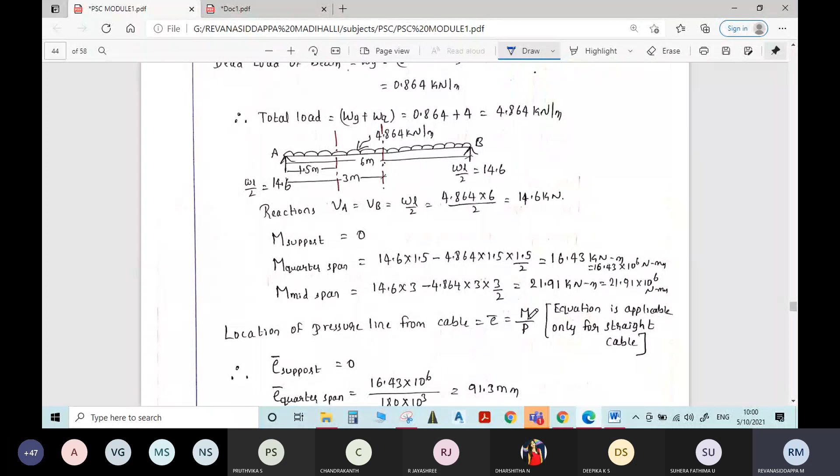Where M is the moment at the point of interest. If you are locating a pressure line at support, you have to take moment at support. If you are locating it at mid span, take corresponding moment at mid span, similarly at the quarter span. This P remains the same, the pre-stressing force remains the same.

Now write the given data. P is equal to, for this second problem, how much is it given? It is given as 180 kilonewton. So P is equal to 180 kilonewton.

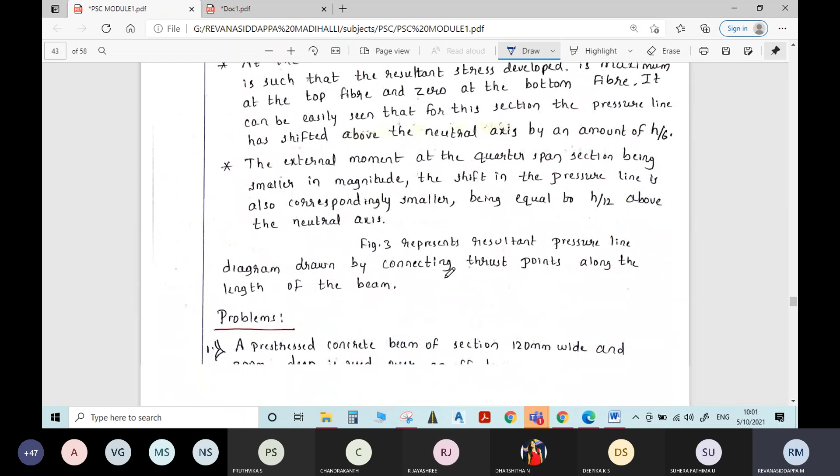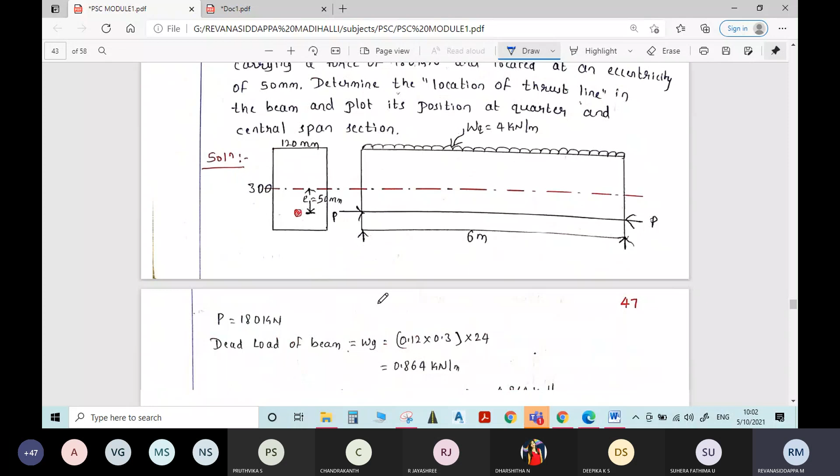Then dead load of the beam. Just a minute students. Is it inclusive? No, exclusive of self-weight, sorry I did not see it properly. It is not inclusive, it is exclusive of self-weight. You have to find it separately, then add it to the live load. I did not say it properly - it is exclusive of self-weight. Now you have to find the self-weight on the beam, dead load on the beam.

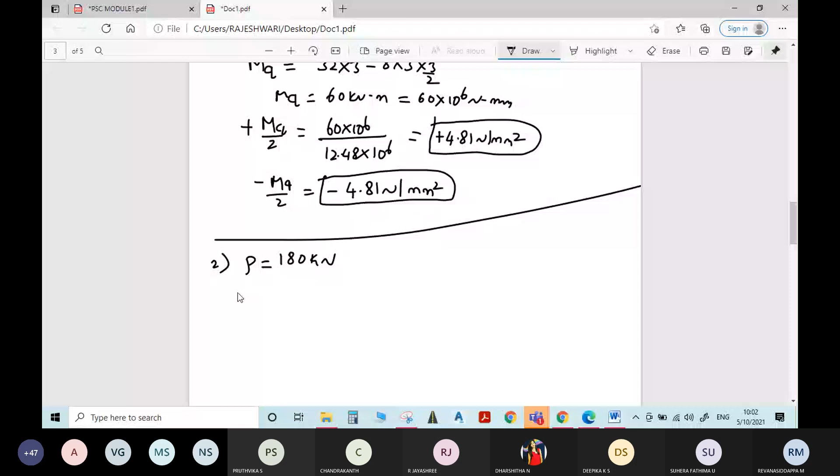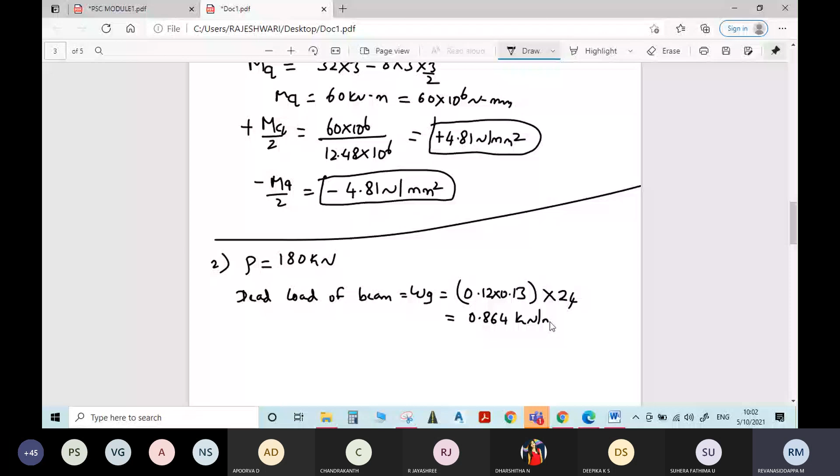Dead load of the beam, WG, is equal to cross sectional area - how much is it? It is given as 120 mm by 300 mm, so it becomes 0.12 into 0.3. Density is known, it is 24 always. Sir, it's 0.12 into 0.3. Sorry, 0.3, I'll make it 0.3.

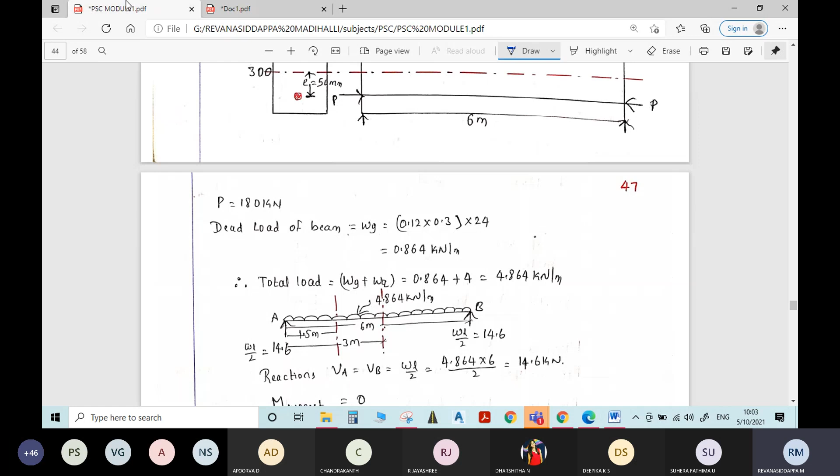Now dead load is 0.864 kilonewton per meter. Live load is given as 4 kilonewton per meter. The total UDL on the beam becomes how much? Therefore the total load UDL is equal to 4 plus 0.864, which is 4.864 kilonewton per meter.

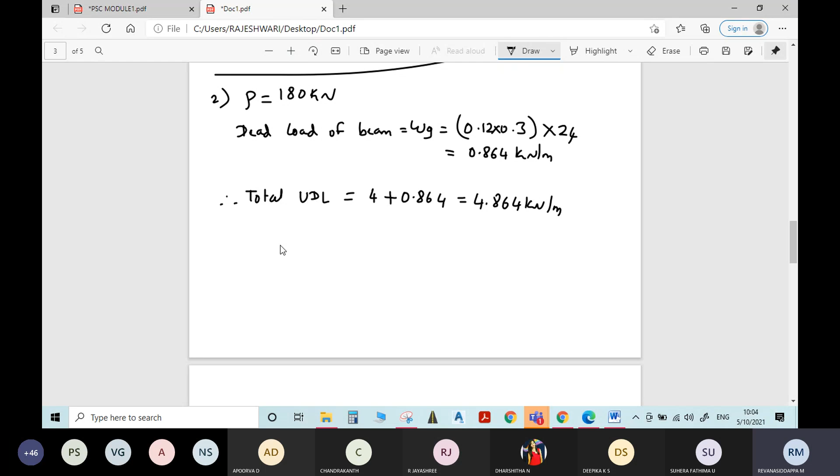Now we have the formula to locate the thrust line, E is equal to M by P, where M is the moment at point of interest. Here it is asked to locate the thrust line at support, quarter span, and center span. First we will find the corresponding moment at support, mid span, as well as quarter span. Write the diagram.

So the beam is acted upon by a total UDL of 4.864 kilonewton per meter. What is the total length of the beam given? 6 meter. Total length of the beam is 6 meter.

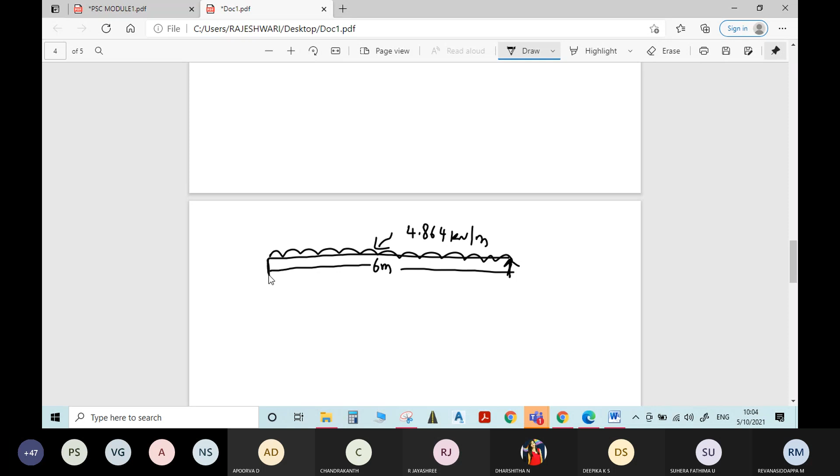Now we have to locate the thrust line at quarter span and at center span. Quarter span means total 6 meter becomes 1.5 meter, and mid span is 3 meter. First you find the reactions at the supports.

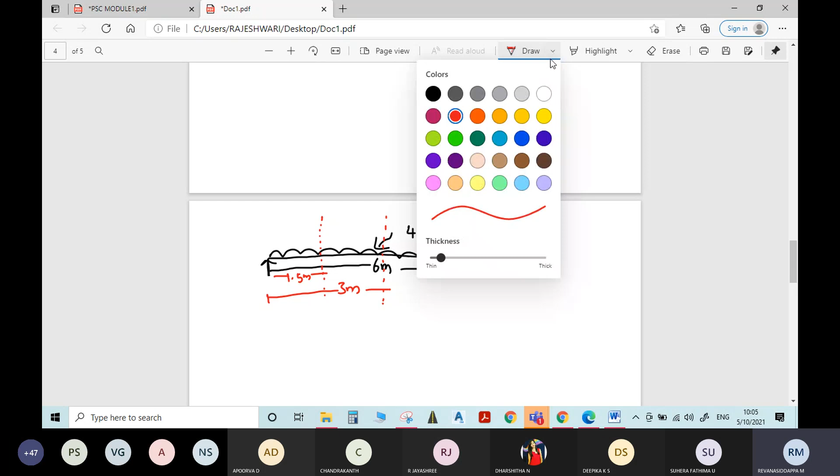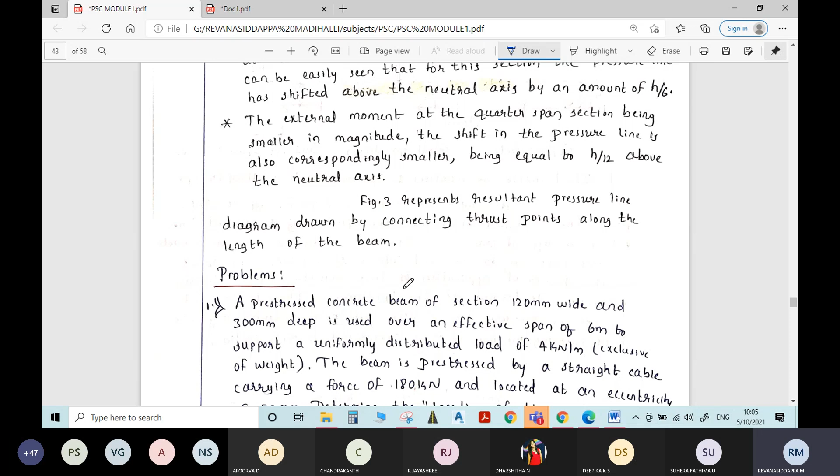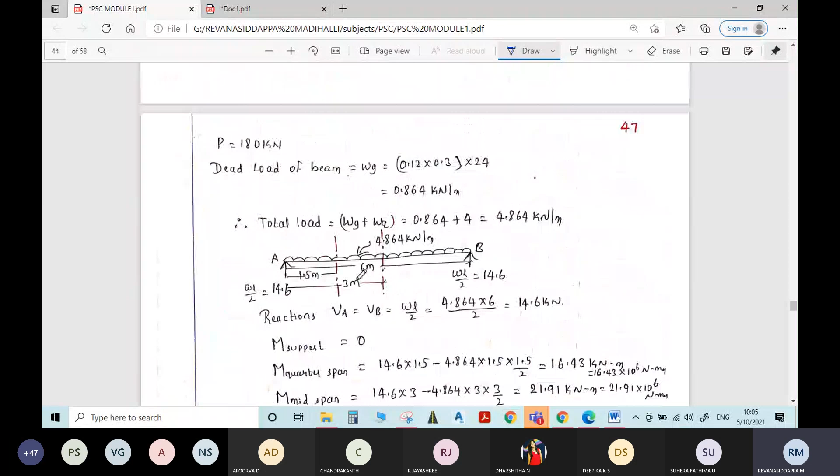Sir, how is it 1.5 and 3 meter? See, in the question they have asked to locate the thrust line at quarter span and central span. Quarter span means 1/4 of total length - 1/4 of 6 meter is 1.5 meter. Central span means half of total length, which is 3 meter.

Okay, WL by 2 - what is the reaction? Tell me. See, 4.864 into 6 divided by 2. How much will you get?

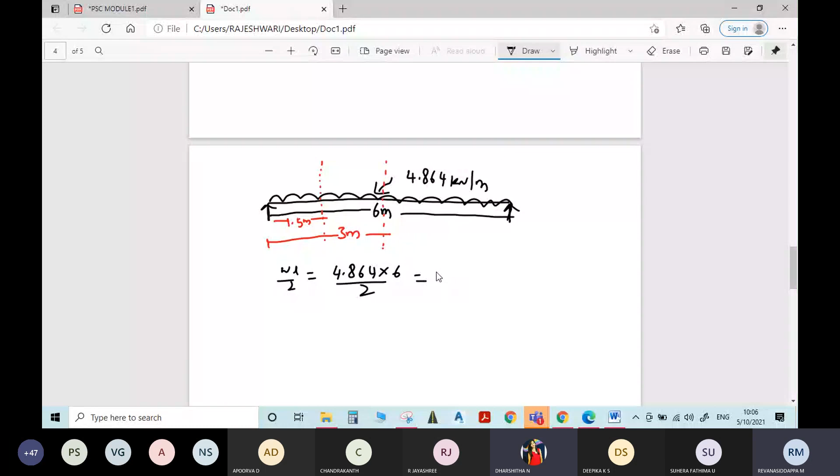14.6 kilonewton. Yes, right answer.

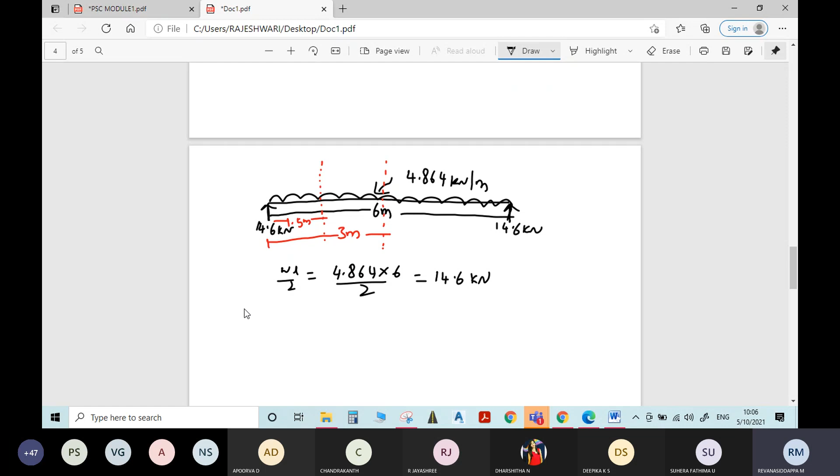14.6 kilonewton and 14.6 kilonewton. Now you find moment at support, quarter span and mid span. Moment at support is equal to, what is moment at support? It is 0 only, right? Moment at support will be 0. 14.6 into 0 and the UDL not yet started. It will be 0 only always.

Moment at mid span will be equal to 14.6 moment of that reactive force at center of the support. Force is 14.6, perpendicular distance is 3 meter into 3 minus moment of this UDL about center. It is 4.864 into 3 into 3 divided by 2. From here to here, the length is 3.

Convert this into point load. If you convert this into point load, 4.864 into 3, it will be a point load into perpendicular distance is 3 by 2. Answer?

Or else you can directly take WL square by 8 formula also. No issue with that. You can find the moment by using reaction, or you can directly apply the formula of WL square by 8.

What is the answer? 21.91 kilonewton meter. 21.91 into 10 power 6 Newton millimeter.

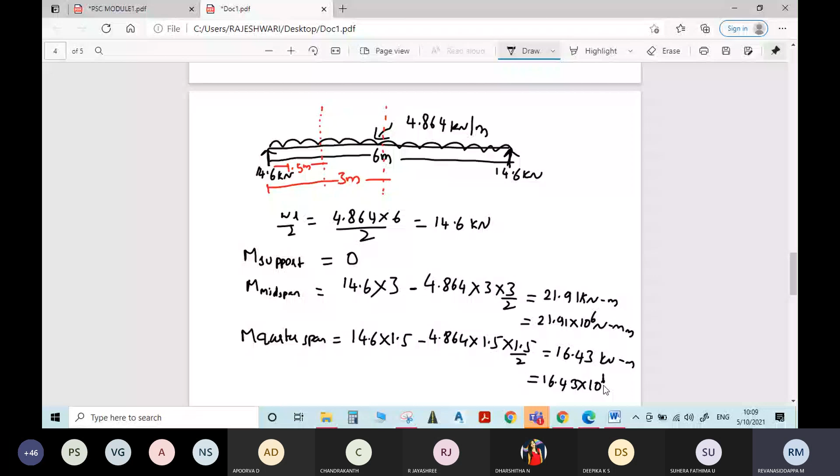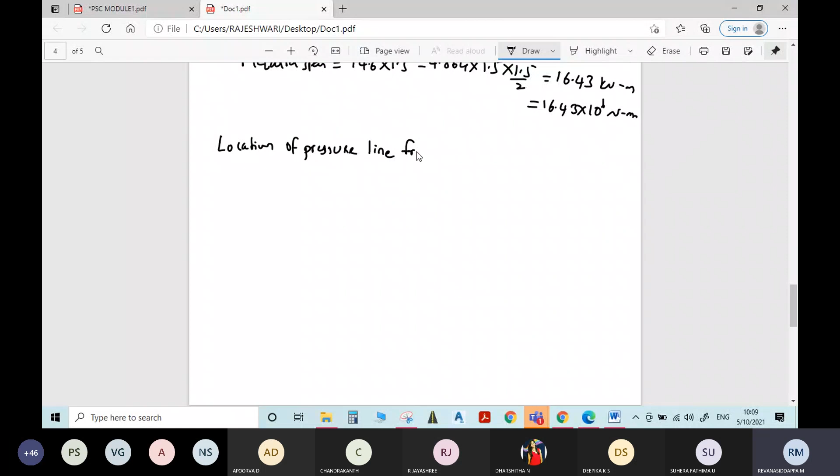Okay, now write that formula. The formula is location of pressure line from the cable. Okay, that location is always with respect to the cable. From the cable, we will denote it as E bar is equal to M by P. E bar is equal to M by P, and this equation is applicable only for straight cable.

In the bracket you write it. Equation is applicable only for straight cable. In the bracket you write it. Okay, if it is a parabolic cable, procedure is different. In the bracket you write it.

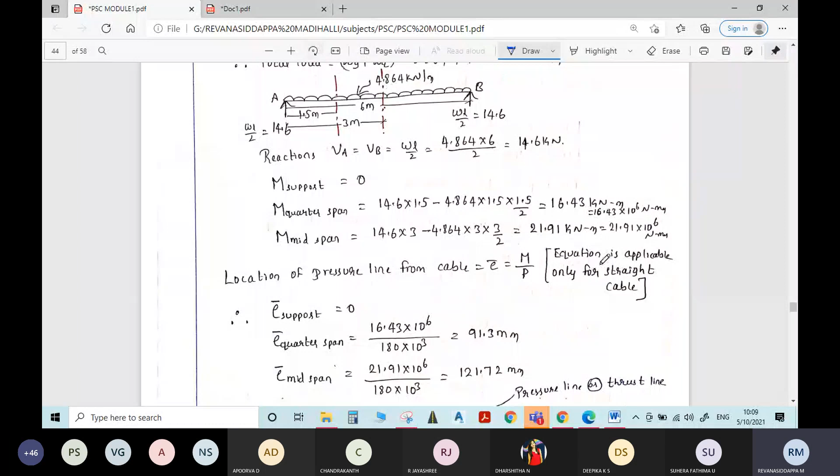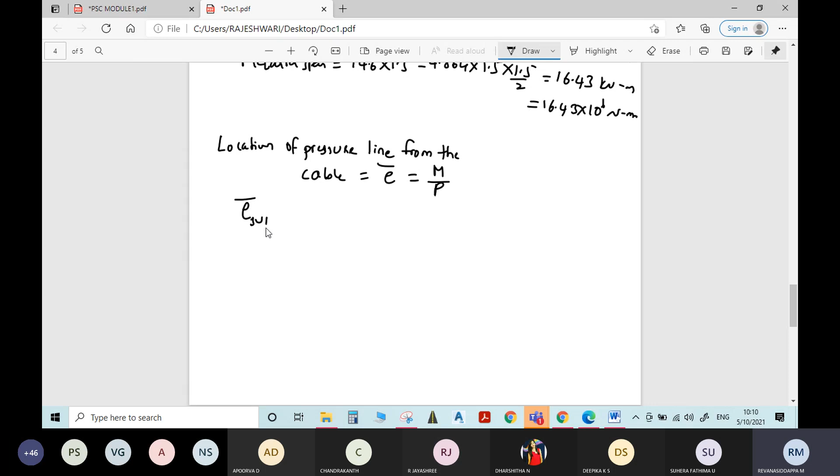Okay, now you go on finding location of the pressure line at each and every point. First at support, E support is equal to, it will be 0 only. Moment at support is 0.

Then E bar at quarter span you find. Quarter span is equal to, moment at quarter span is 16.43 into 10 power 6 divided by the pre-stressing force is how much it is? 180 into 10 power 3.

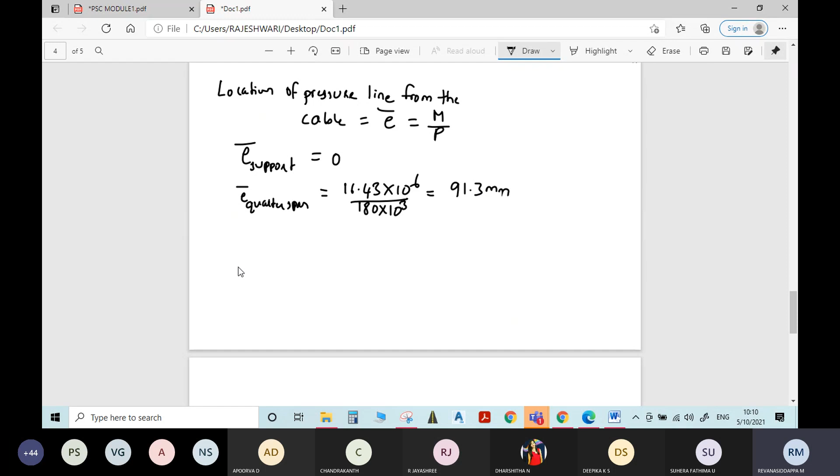So what's the location? What is the answer? 91.3 mm. Similarly, you find location of pressure line at midspan is equal to, corresponding moment at midspan is 21.91 into 10 power 6 divided by P is 180 into 10 power 3, is equal to how much? 121.72 mm.

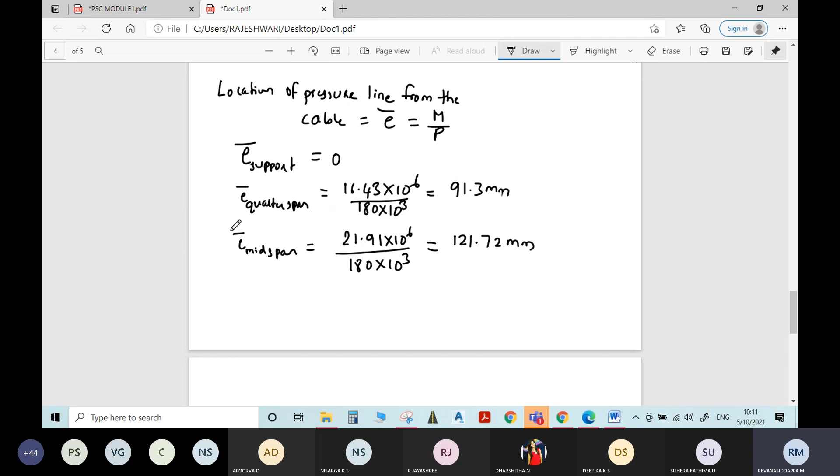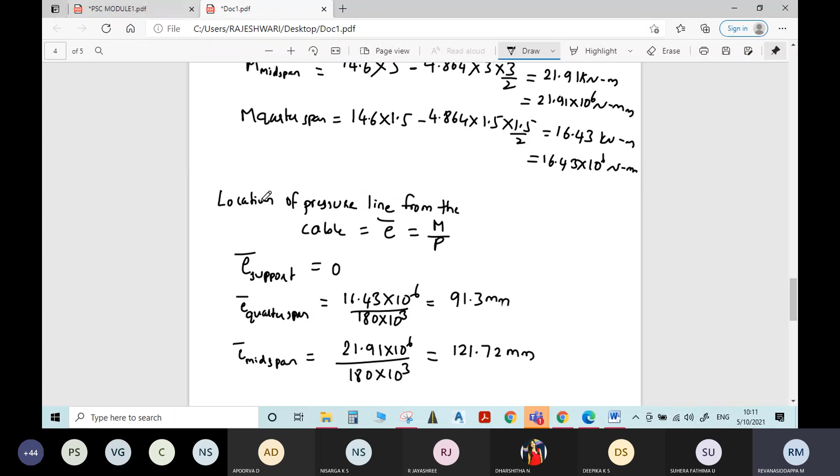Okay, now after getting location of pressure line at each and every point, you have to write the diagram accordingly. Okay, here I already written the diagram. Before copying, you just listen here. See, whatever the formula which we have, it is distance of pressure line from the cable, with respect to the cable. At support, distance of pressure line from the cable is 0, at support.

Okay, and I have marked midpoint, quarter span. At quarter span from the cable, distance of pressure line is how much? 91.3 mm. Okay, at quarter span, I have marked a distance of 91.3 mm. Similarly, at center of the span, it is at a distance of 121.72 from the cable.

Okay, similar in the same way, you will get points on other side of the beam. Finally, you join together, you will get a pressure line or thrust line. Write this diagram quickly.

And note on the next problem also.

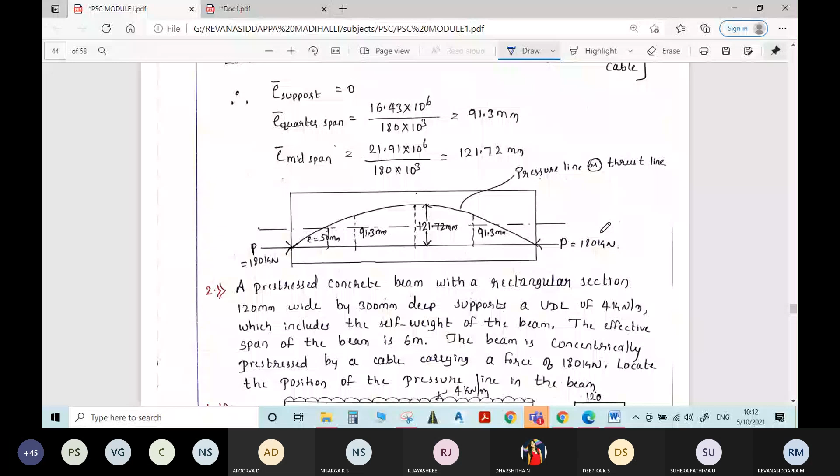Sir, if they have not given this exclusive of weight, what should be the procedure, sir? We should not consider this dead load. If it is not given, then individually you have to find selfweight.

If it is not given means exclusive of weight. If it is not given means, even if it is not given, then you find the selfweight. Okay, selfweight you add it.

See sir, here in the second problem you see here, deep supports UDL of 4 kN per meter, which includes the selfweight. Means selfweight is already included. Okay, then no need to find the selfweight. Okay, directly you find the moment for this load given.

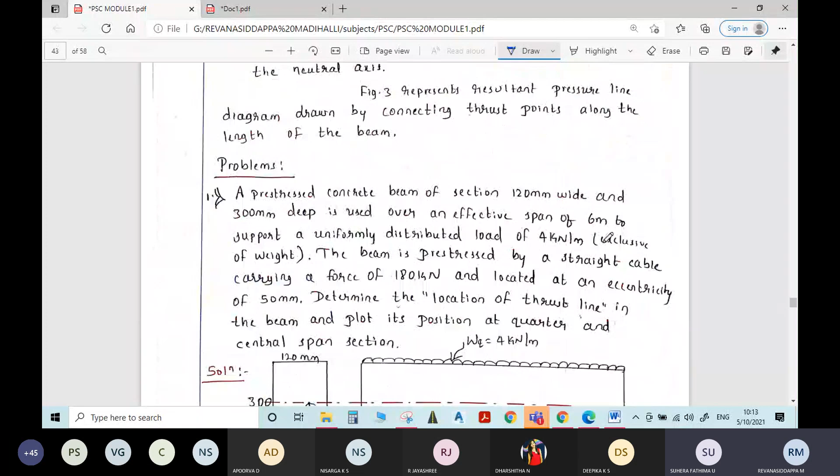Here it is said that exclusive, then you need to consider selfweight. Okay, if anything is not said, whether it is inclusive, whether it is exclusive, if anything is not said, then in that case also you find the selfweight and add to the live load and find the thing.

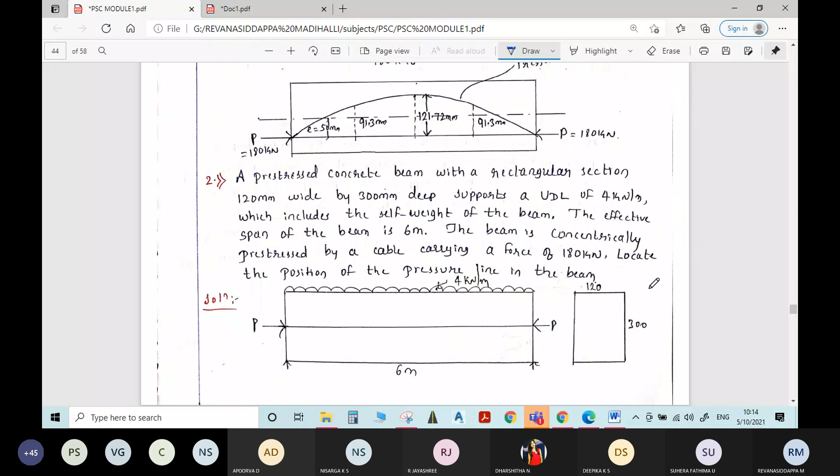Write the next problem also after writing the figure.

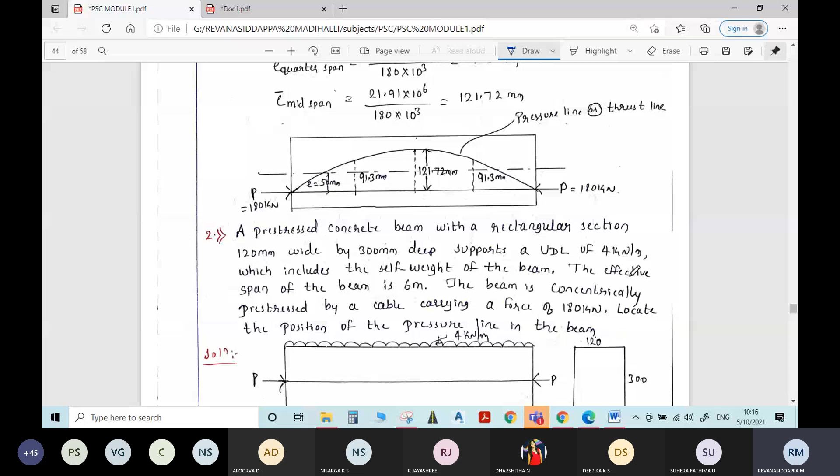Go on solving the problem. Okay, same procedure. Only the thing is self-weight, you need not find it. Directly take the live load of 4 kN per meter and locate the thrust line. So directly take this 4 kilonewton per meter, find corresponding moments, find eccentricity and draw the diagram. That's all.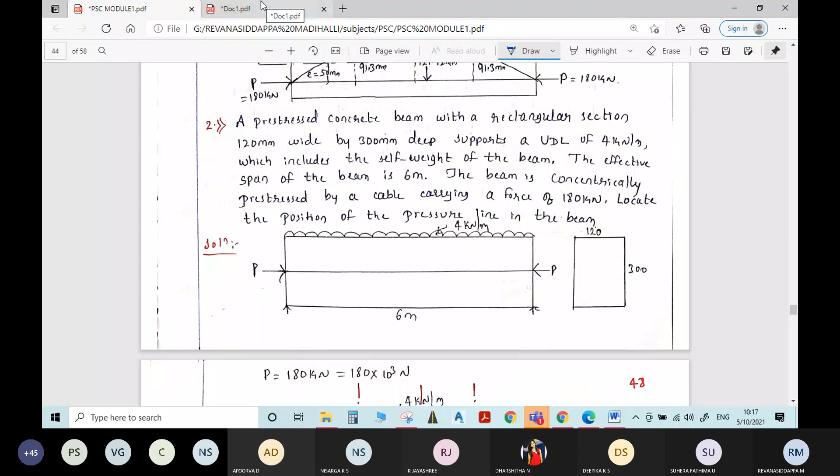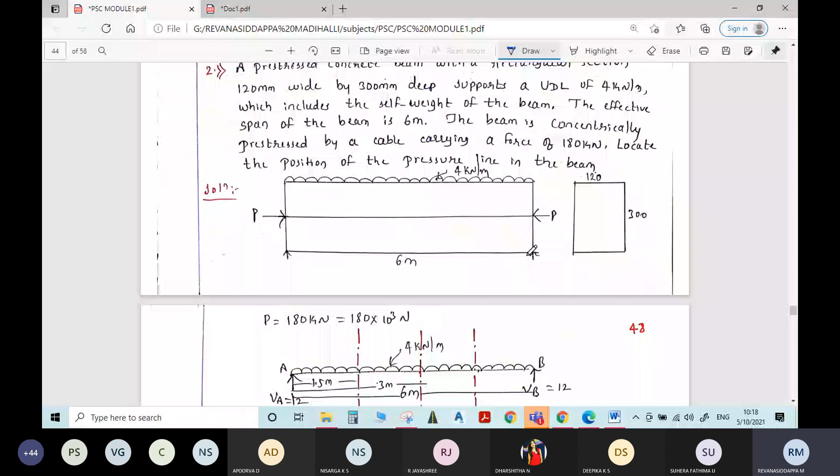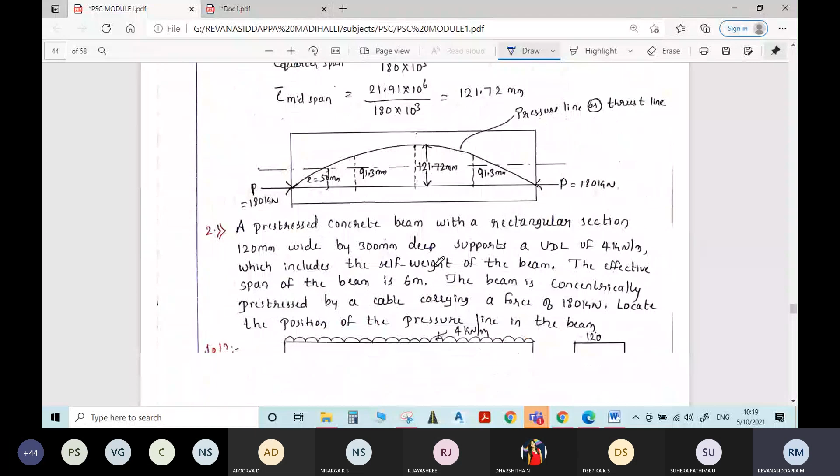Shall we solve now? Here it will be 4 kilonewton per meter. Here the reaction will change. What will be the reaction here? 4 into 6 divided by 2. I think 12 it is, right? We'll get 12 kilonewton. All of you written the problem, right? Same procedure. Instead of 4.864 here, you have only 4 kilonewton per meter. Check your answers.

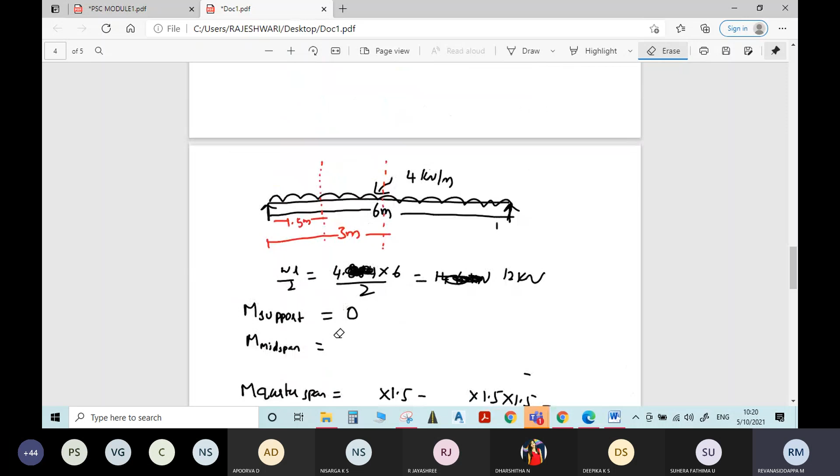What is moment at midspan? Anyone solved? Midspan moment. Tell me. Reaction is 12 kilonewton on either side. 12 kilonewton here also. How much moment at midspan? Anyone? 18, sir. Yes, it is 18. Correct. At quarter span also you find. It is 12 into 3 minus 4 into 3 into 3 by 2. You will get 18 kilonewton meter, which is 18 into 10 power 6 Newton millimeter.

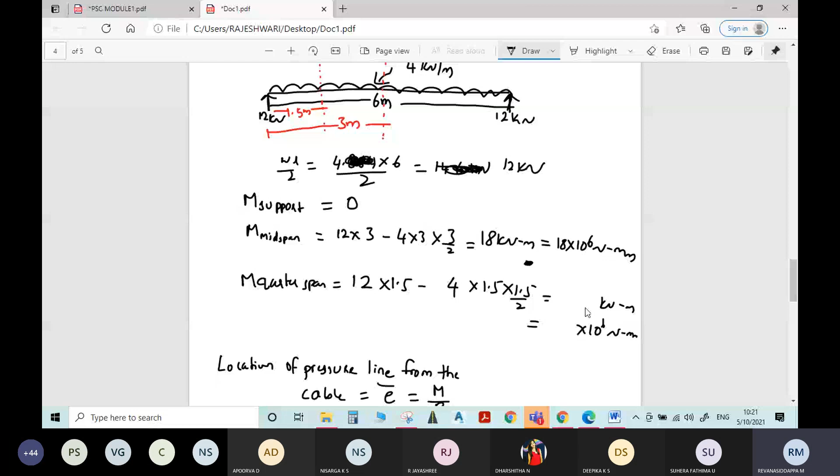At quarter span it is 12 into 1.5 minus live load 4 into 1.5 into 1.5 divided by 2. Tell me the answer. 13.5, sir. 13.5 into 10 power 6 Newton millimeter. Write the same formula. Here at quarter span 13.5 into 10 power 6. Then at midspan 18 into 10 power 6.

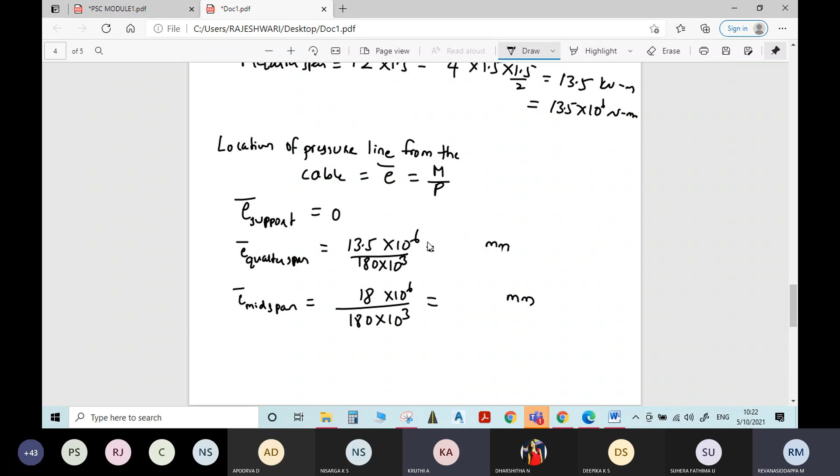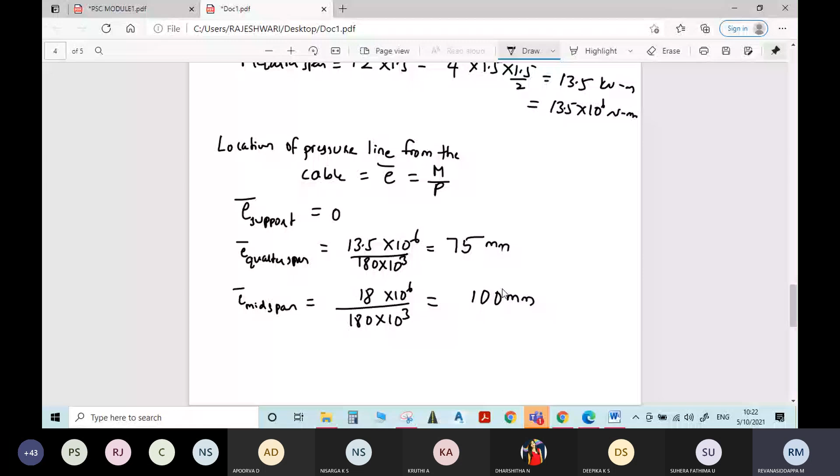Anyone got the answer? Tell me. 75 mm, sir. 75 mm. At midspan? 100, sir. Yes, 100 mm. Write the figure. At quarter span, eccentricity is 75 mm. At midspan, eccentricity is 100 mm.

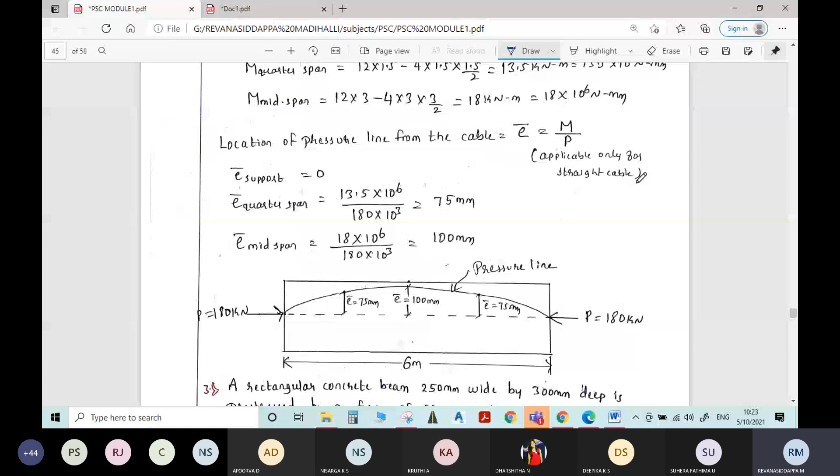After writing the figure, write the next problem. Try to solve this problem. Problem number 3. Instead of UDL, he has given a point load of 68 kilonewton. Follow the same principle. You find the reaction, you find the moments at quarter span, mid span. Use the same formula. Same procedure you have to follow.

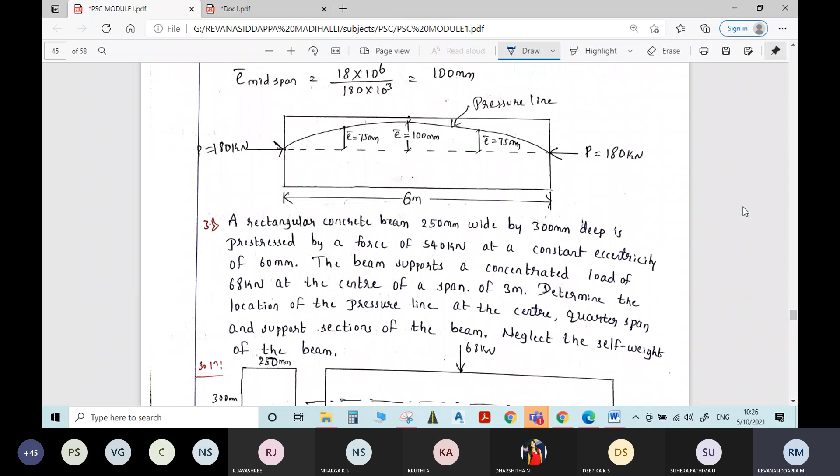Vaishnavi, are you writing? Vaishnavi. Sampath Kumar. Sampath Kumar. Yes, sir. Writing? Sir. Ravi? Sir. Okay. Problem number 3. Sir, question, sir. Okay. Still writing? Yes, sir. Write it. After finishing the question, you tell me. Okay, anyone of you tell me.

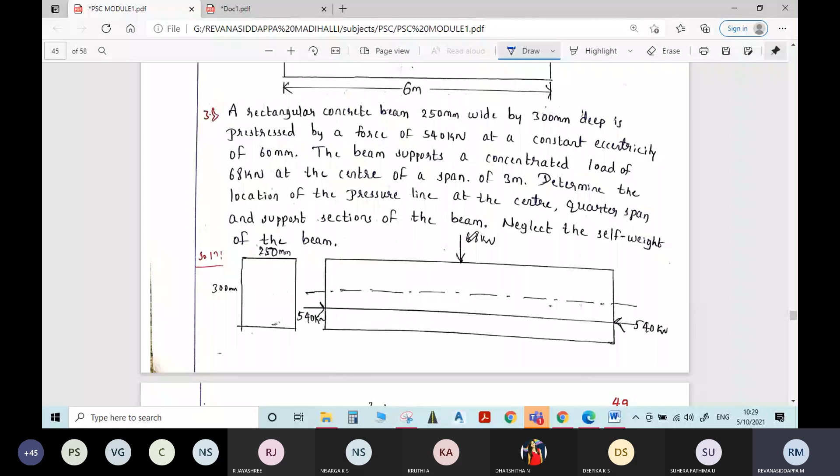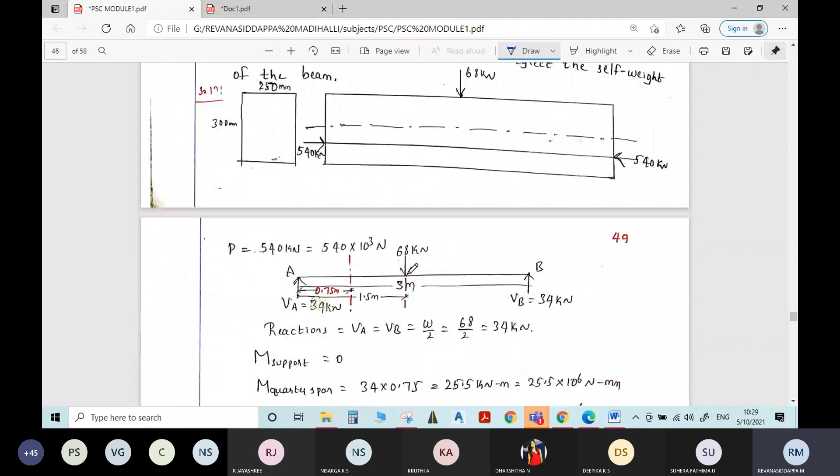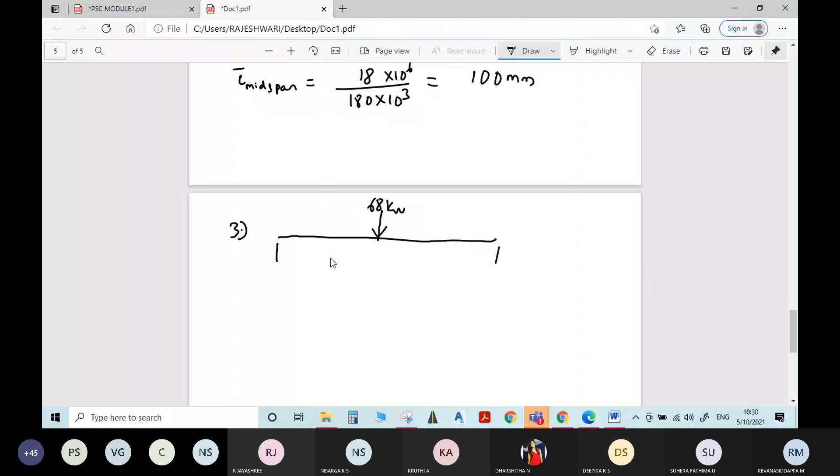So no need to find the self-weight. Whatever the load is given, directly take that load and find the location of the thrust line or pressure line. Write the corresponding figure. The beam having a span of 3 meter acted upon by a concentrated load of 68 kilonewton. The total span is given as 3 meter. Then in the problem it is asked to locate the pressure line at quarter span and at center span.

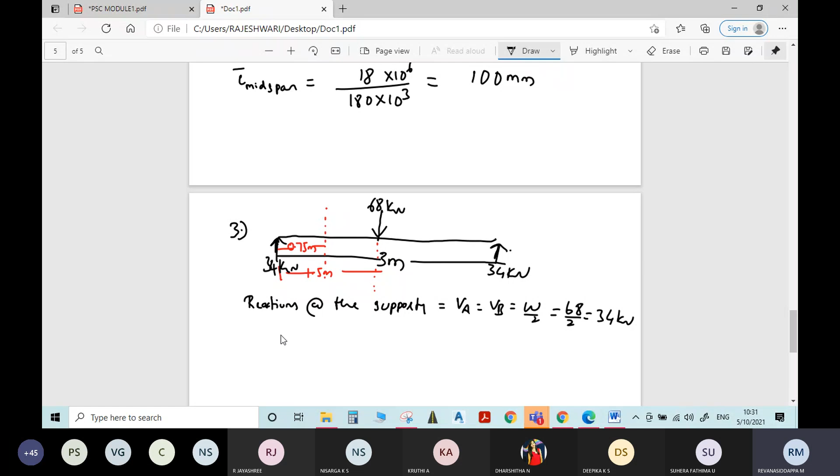Quarter span means how much? 1/4 of 3, that is 0.75, right? And 1.5 meter, half of the length. First, find the reactions at the supports. It is symmetric loading, so directly divided by 2, W by 2. VA equal to VB is equal to W by 2, 68 divided by 2, 34 kilonewton. So here you write the reaction of 34 kilonewton. Here also 34 kilonewton. Now you can find moment at support, mid span as well as quarter span.

Therefore, moment at support, how much? It will be 0. Then moment at quarter span, at 0.75 meter from support. 34 into perpendicular distance, 0.75 meter. There is no external load or live load existing in this span, only 34 into 0.75. How much? If you get any doubts, you can ask me. 25.5 kilonewton meter. 25.5 into 10 power 6 Newton millimeter.

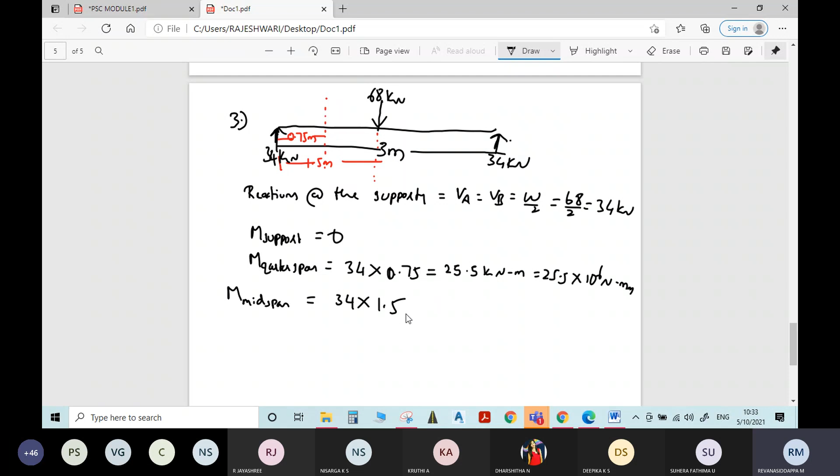Then moment at midspan will be reactive force 34 into perpendicular distance 1.5 meter, minus 68 into perpendicular distance, which is 0. Why? The point lies in the line of action of the force itself, so there is no perpendicular distance. 68 into 0. How much, students? Answer? 22.66. I got 51.

51, sir. Okay, 51. 51 kilonewton meter. 51 into 10 power 6. Just calculating at support, sir. Sorry? How it is 68 into 0, sir? See, point here. No. You are calculating moment at midspan, right?

Moment at midspan. Okay. Moment of this 34 kilonewton about midspan, midpoint becomes 34 into perpendicular distance 1.5 meter. Perpendicular distance of 34 kilonewton from midpoint is 1.5 meter. With respect to 68 kilonewton force, there is no perpendicular distance. Point lies in the line of action of force itself. 0 it is. For 34 you have the perpendicular distance. For 68, point lies in the line of action of force, so there is no perpendicular distance. It is 0. Is that clear?

Yes, sir. Or else if you have any confusion, directly apply WL by 4. Moment of concentrated force which is acting at the center of the span is always how much? WL by 4. If you calculate, you will get the same answer. But quarter span you have to follow this procedure only. Okay. Now write that formula, eccentricity formula. That is location of pressure line formula. Location of pressure line from the cable, E bar is equal to M by P.

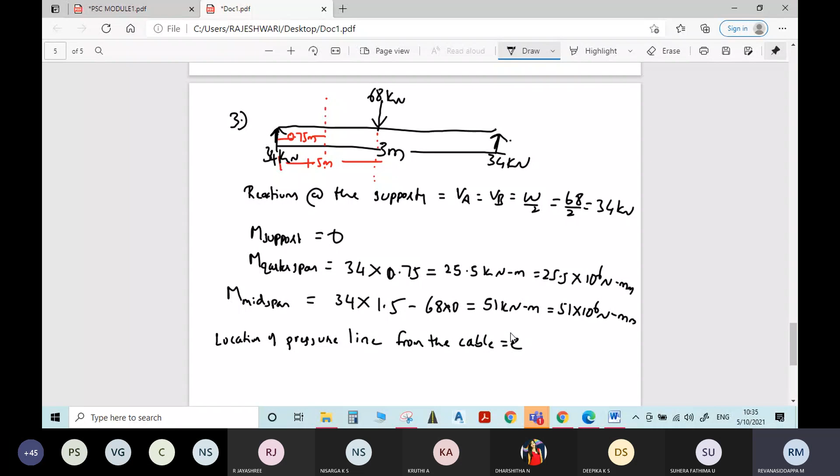Okay. Now find the locations at corresponding points. That is E bar support is equal to 0. Moment is 0, that's why it becomes 0. Quarter span is equal to quarter span moment 25.5 into 10 power 6 divided by what is the pre-stressing force given? How much is the pre-stressing force given? 540. 540 into 10 power 3 in terms of Newton. Then midspan is equal to moment at midspan 51 into 10 power 6 divided by 540 into 10 power 3.

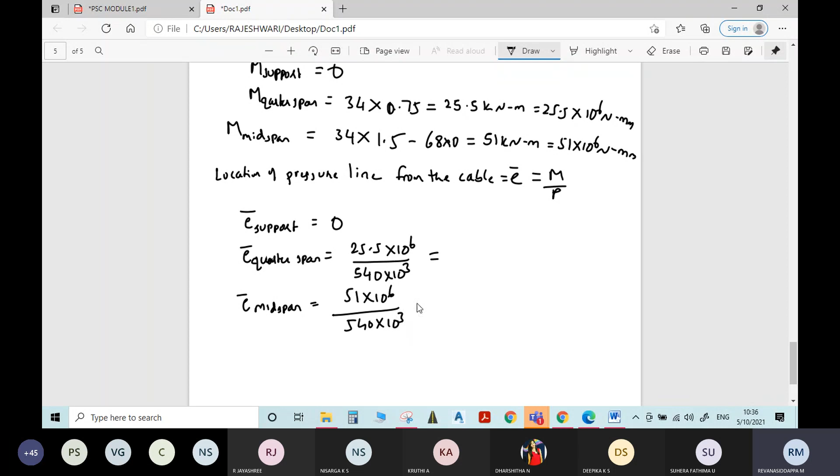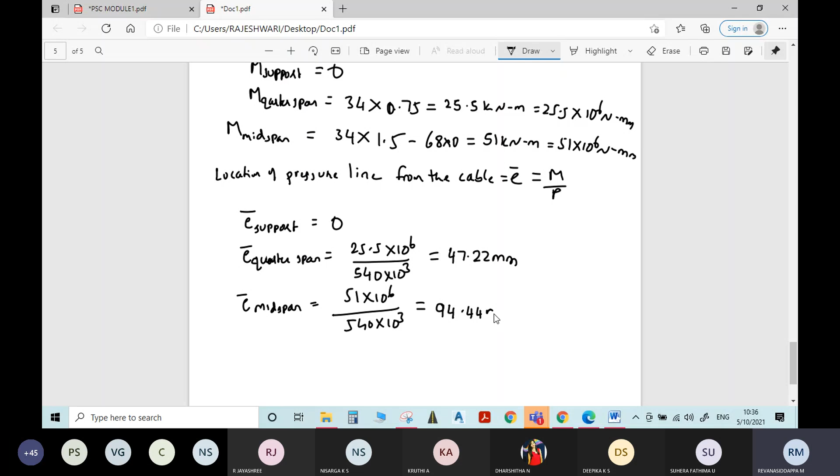Tell me the answers. At quarter span? 47.22. Yes. Millimeter. At midspan? How much? 94.44 mm. Okay. Now if you draw the diagram with respect to the values obtained, this will be the diagram. At support 0, at quarter span it will be at a distance of how much? Just a minute.

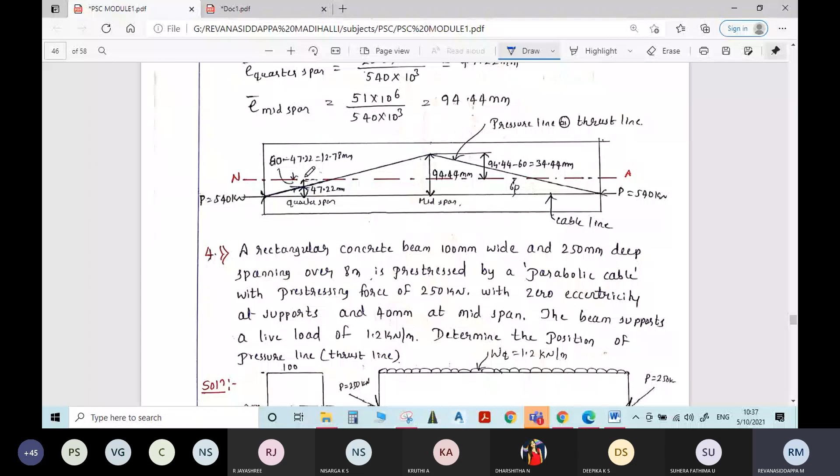47. Whatever the formula is there, it is from the cable. From the cable it is how much? 47.22. From the cable, point is located at a distance of 47.22 mm. Similarly, at the center of the span, from the cable line, the pressure line is at a distance of 94.44 mm. You join all the points. From the neutral axis, if you want to find the answer, that will be 12.78. Okay.

The total depth of the beam is given as 120. So half of depth is 60. 60 minus 47.2, if you do, you will get 12.78 mm. Sorry, this eccentricity is given as 60 mm. The cable eccentricity is given as 60 mm. 60 minus 47.2, if you do, you will get distance from the neutral axis. Even if you do not write this, no problem, if you don't get confused. From the cable line, yes.

Sir, is this thrust line a parabola or triangle? It's the triangle. We should join points. See, what is the nature of bending moment for the point force? It will be triangle, right? Yes, sir. Nature of bending moment for the concentrated force, it will be triangle. So directly join by a straight line. If it is a UDL, always the nature of bending moment will be parabolic. Okay, sir.

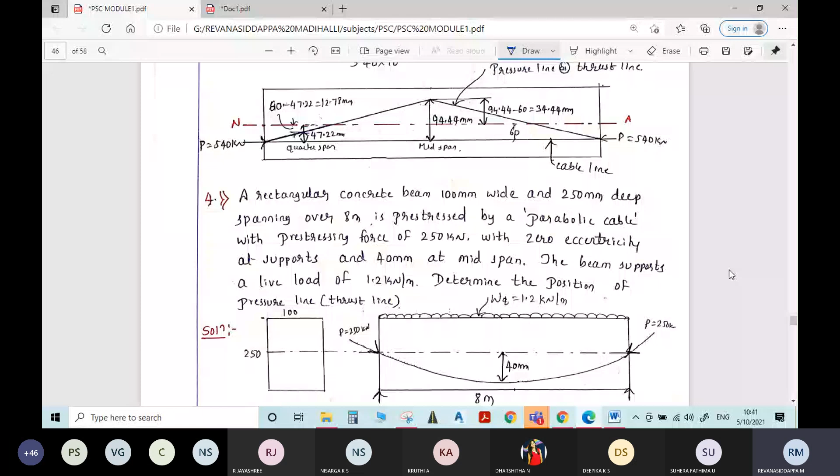Take the next problem after finishing the previous one. After finishing, write the problem number 4. Don't follow the previous procedure for this problem. Procedure is different.

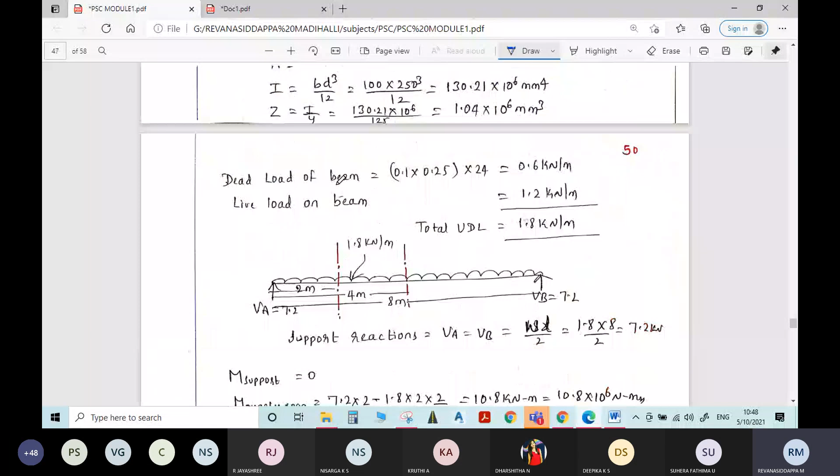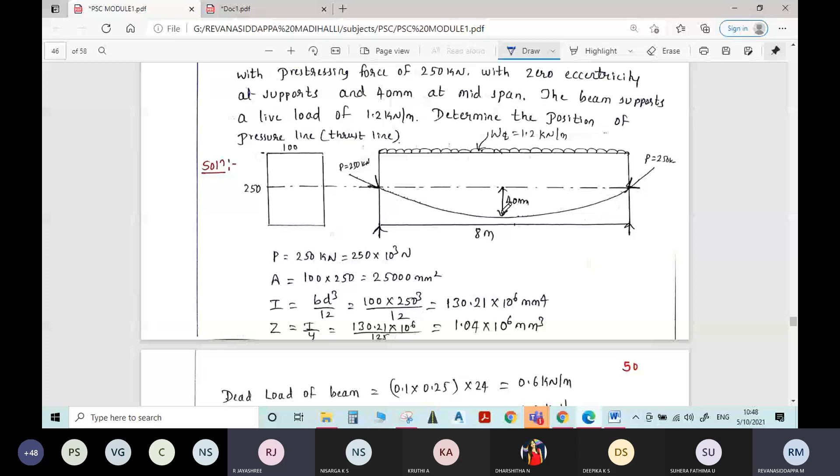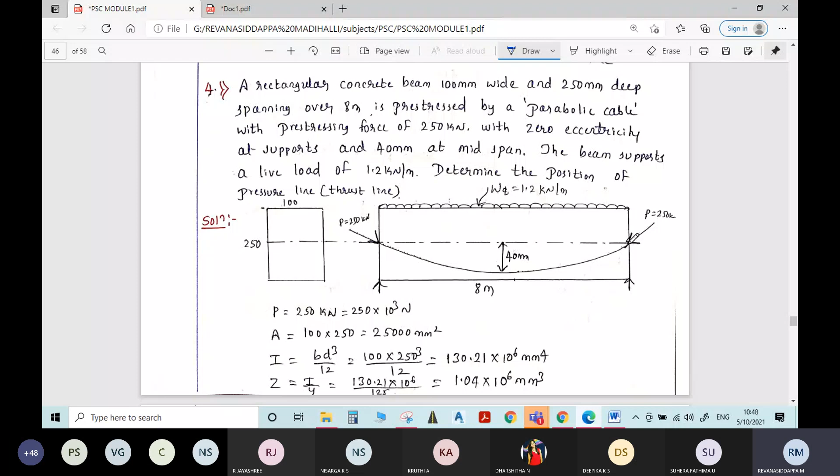The beam supports a live load of 1.2 kilonewton per meter. Determine the position of the pressure line. As I told earlier, this formula is applicable only for straight cable. Here in this problem, he has given parabolic cable. Any doubts here? Here parabolic cable is given, then the procedure is different. Then how to find the pressure line for a parabolic cable?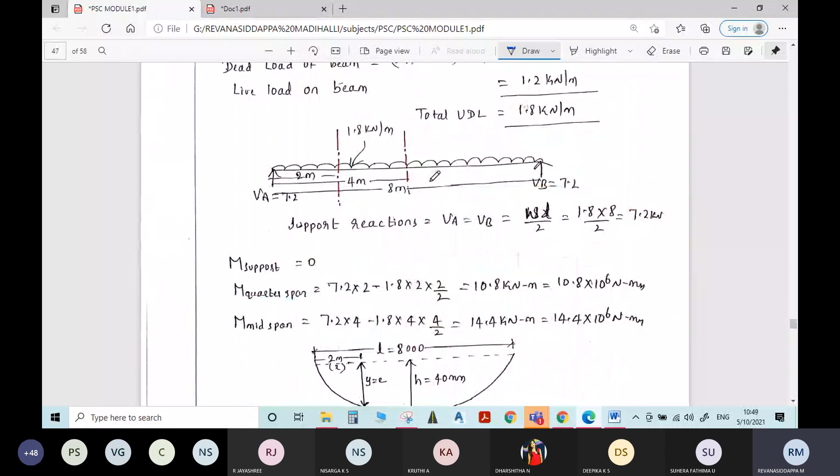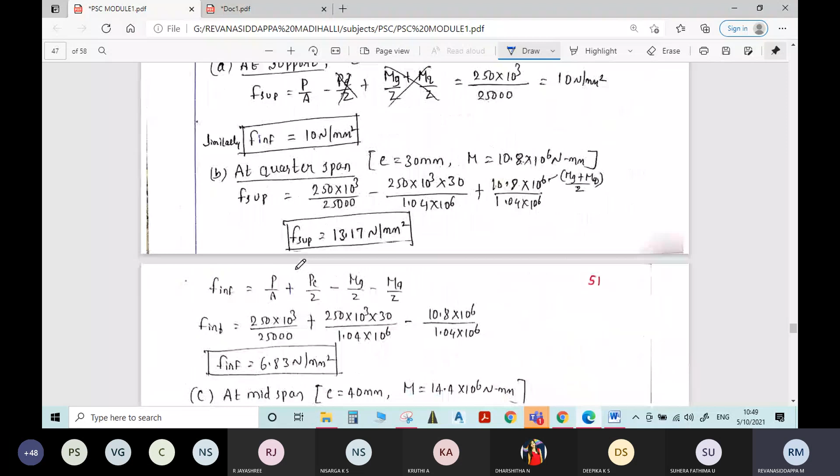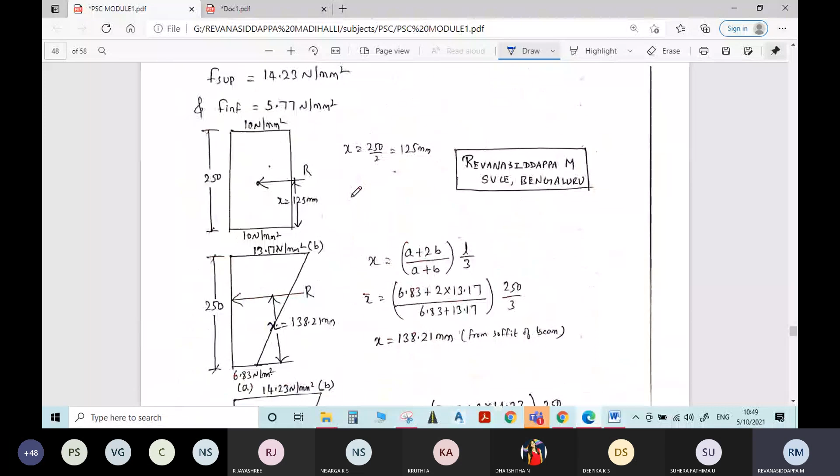Beam carrying parabolic cable means, again you have to find resultant stresses at top fiber and bottom fiber. After that you have to look at centroid of the stress distribution diagrams. You have to find from the first principle by applying that formula. You have to find F superior and F inferior, that is the stresses at top fiber and bottom fiber. Then for each individual figure you have to look at centroid. Finally, after joining, you will get the pressure line. Let us solve this in detail so that you can understand.